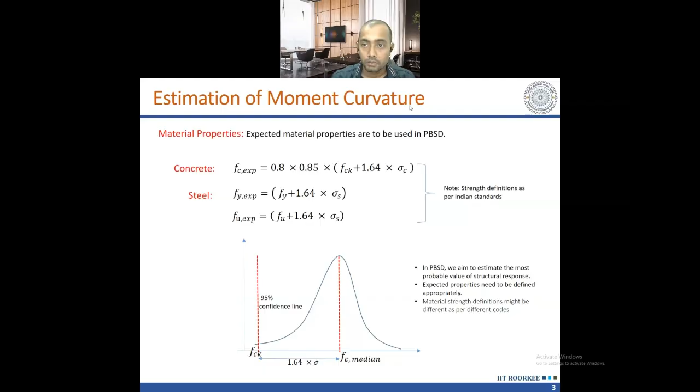I think I'm not able to change my slide. Sorry.

Okay, so the next part of discussion, we have to talk about confinement.

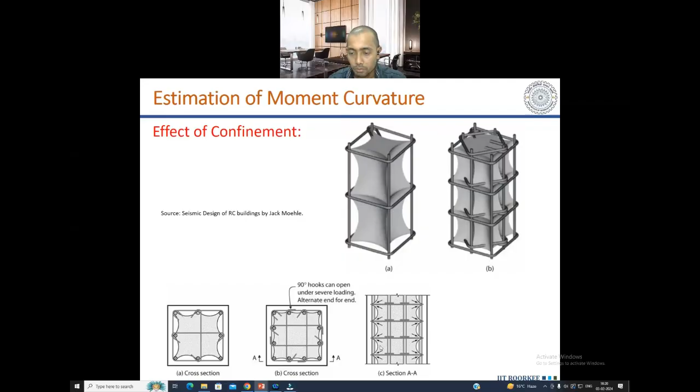Similarly, if you see along the length or axis of the member, not just in cross section, how much quantity of concrete is protected - along the vertical direction also you can see how it is protected because of the lateral reinforcement. So what happens?

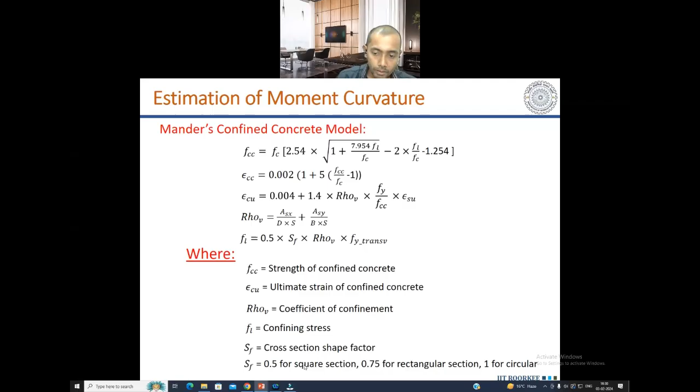Okay. Now in any section, you will have some neutral axis where there is no strain, there is no stress. Okay. And above the neutral axis, you say that is the compression zone, and below the neutral axis, you say that is the tension zone. Okay. And code says that the concrete portion in the tension zone should be...

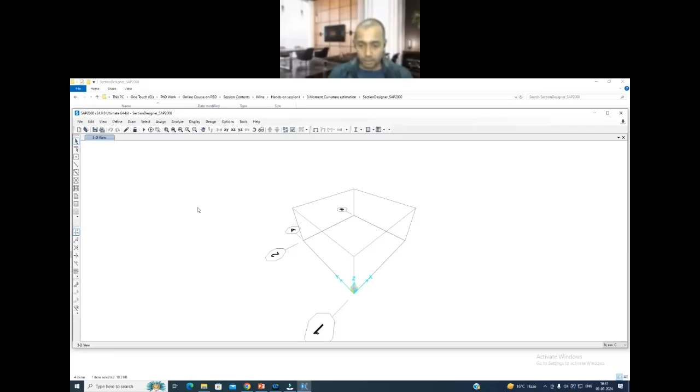Okay, so at this point, I have to let you know: whoever is a first-time user of SAP or ETABS, don't worry. When we start with our actual building model, all the steps you need for defining materials, defining sections, everything you'll come to know. We'll do it step by step. But still, I'll show whatever steps we have done, briefly without explaining in detail.

So first, we define the material. Here I have defined Fe 500 according to our Indian standard. Inside you can see this is the nominal yield strength, and this is the nominal ultimate strength, meaning the strength which is defined, for example 500 for Fe 500, and this is the expected one. I have shown you expected strength is equal to nominal strength plus 1.64 into sigma. If you use this, you'll get this expected yield strength.

Similarly, if you apply that concept to the ultimate strength, you'll get this one. Here you need the sigma value: expected ultimate strength is equal to nominal ultimate strength plus 1.64 into sigma s. That sigma s is normally between 30 to 50 in case of steel, and 5, as I already told, in case of concrete. Here you get this using 30, not 50. We have done some calibration based on experimental results and found 30 is appropriate for expected strength, so you can use 30 MPa for sigma in case of steel.

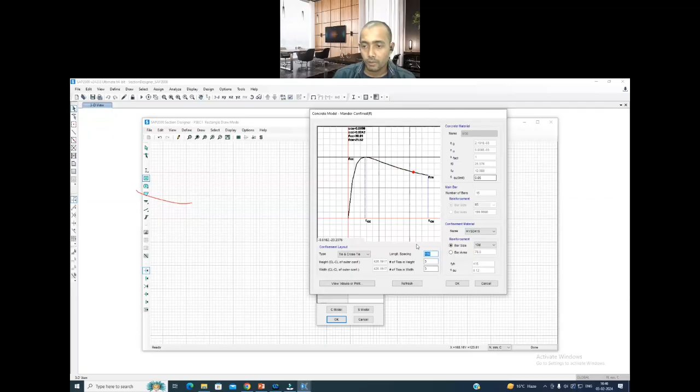And you can also see how these properties are changing when you modify these parameters. As you increase the number of legs, your strength is increasing, and with decreasing spacing also, this is increasing. So you can imagine how these parameters affect your confined properties of the concrete. So like this you have to do, then click OK.

Now see, it is showing some default arrangement of reinforcement also. So you may have different number of rebars and different diameter. So what you have to do, you just click on any of the bars, then right click. And here you see the bar diameter. Again, as per Indian standard, let's say I want to use 25 diameter for corner bars, and the remaining thing it will automatically calculate. And also if you want the same properties for all the edges, you can click on that.

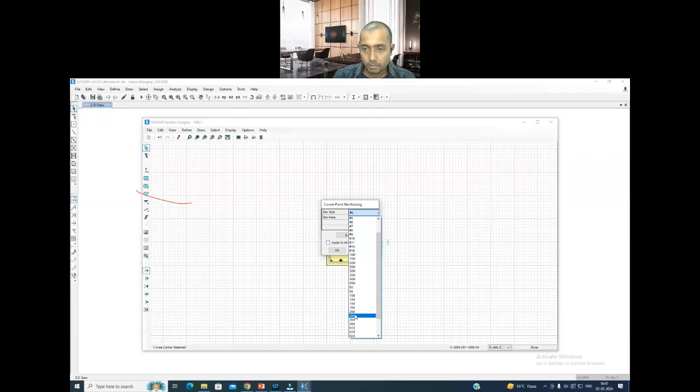Sorry, I think I didn't click that. So you can do this. Then for corner also, and apply to all corners. Then you can do this. So this is the thing you have to do in the section designer.

Now this is the default section shape which is available in the software. But suppose you want some customized shape, you can do that by using some lines. That option I will not discuss here. This is the interface you have. You can explore what different options do. You can do that also for customized sections of different types of shapes.

After creating the section, you click on this one to get your moment curvature, and here you see this is the moment curvature plot for zero axial force. Here you have to define the axial force, how much you have, and it is written tension is positive.

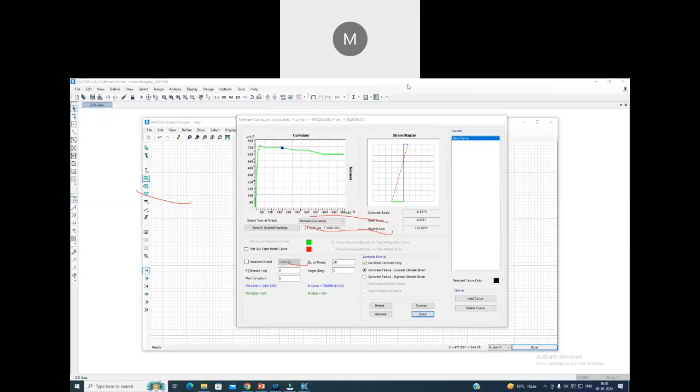I think someone is using annotation. Please, whoever is using that one, stop that. I don't know how I can do it from here. Sir, you can go to edit and there is an option annotate on or off. In the WebEx window there is an annotation tool on the top left, outside SAP. Or just reshare, it will go out. Okay, I'll do that. Someone is asking for approval of annotation. Please don't do that. Okay, it was here, top ribbon. Fine, we can continue.

So you have the compression force as axial force. You can give it as minus, for example, 1000 kilonewton. I am defining in terms of Newton, mm, centigrade. So it will be, sorry, 10 lakhs Newton. After doing this, you just click somewhere outside this box. You will get the update of this moment curvature curve.

Small question: what is the blue dot? The blue dot is, I think, some kind of performance level. Let me check. This is the performance level, but I don't know exactly which performance level. So this blue dot is strain of confined concrete. It's like capping strain of the confined concrete. Some performance level it is showing.

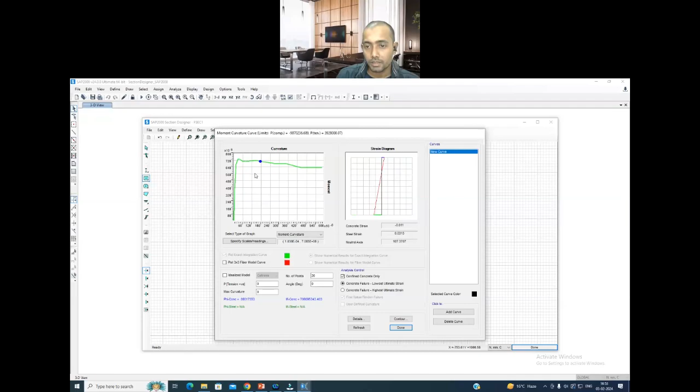But the strain is showing at the right, sir. Yeah, if you look at the diagram, it is strain showing stress. When you go along the M-phi curve, you can see values of strain are changing. If you look at the values here, into Excel, you can see the strain. You have to see here - when I am moving my cursor here, the strain variation you can see here, for concrete as well as for steel. Regarding strain, we will discuss this. You'll come to know, we'll discuss all these things.

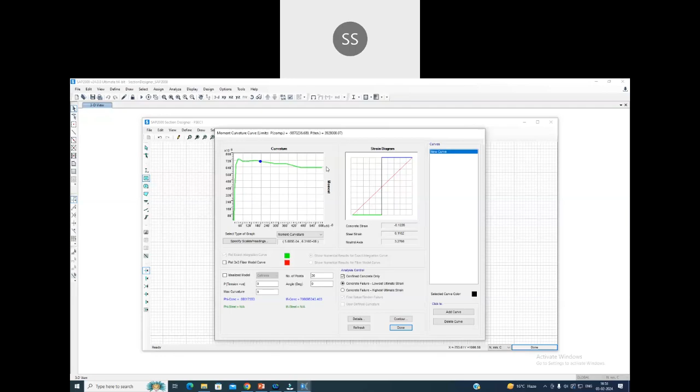Sir, this is not failure criteria actually. This is not showing any failure criteria. This is just a curve of your section. You have given some section as input. It is showing the overall capacity from zero to maximum, whatever capacity it has. Now you have to decide at what point you have to consider this as a failure. Okay, that we'll discuss. But actually I don't know exactly what it is showing, I have to verify this one. Don't compare this thing with the failure - that is a different thing, we'll discuss.

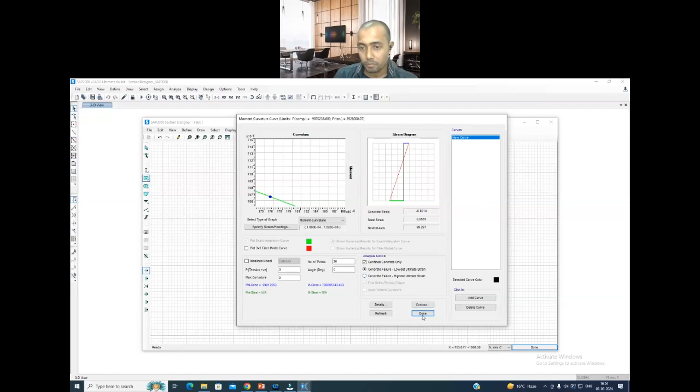We will discuss that, okay, please wait for a moment. I am telling you, just copy this data and plot in Excel, you'll get some different shape. Don't go by this interpretation.

Okay, so this section is already created, that's why I didn't save this one. And you see the shape here - this blue shape, as sir currently asked why it is going flat. This curvature is up to 0.0001. At this point you just check what is the strain value of that one, that you will get to know from this analysis again - for getting this curvature, what was the actual strain in your steel and what was the actual strain in your concrete. That parameter you can note down.

Now the software is giving some flat region. To verify this flat region, why it is giving this, you have to first find out what is the strain at this level, at this curvature level. So you analyze the section and at this curvature find out what is the strain here and what is the strain here. Once you get to know this - this much is the strain in steel and this much is the strain in concrete - then you go to this curve and verify at what point of the stress strain curve it is. This is what you have to do to understand whether it is failing or not.

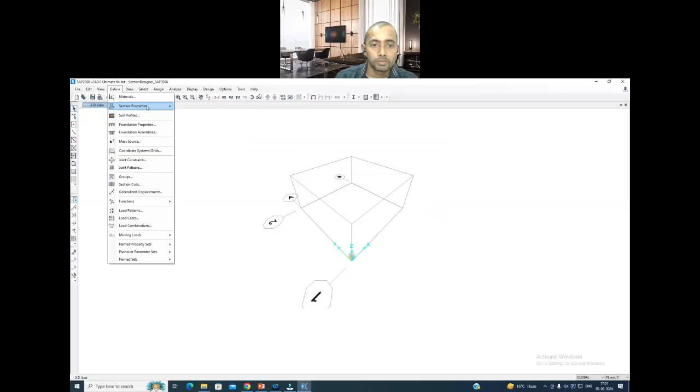So here it was getting down. Now see, it has changed, of course, and it will depend on the strain capacity whatever strain you are giving.

Please wait for a moment - when I go to the Python code, there I'll show you how you are defining that parameter, you will be more clear. Because if we start discussing this question in between, maybe we'll not be able to cover the session. So just keep your question ready, and whenever we come to that point you can ask. Okay sir.

Okay, so using SAP we have shown. Then SAP ETABS is similar, I'll just open and show - no, I'll not discuss, okay.

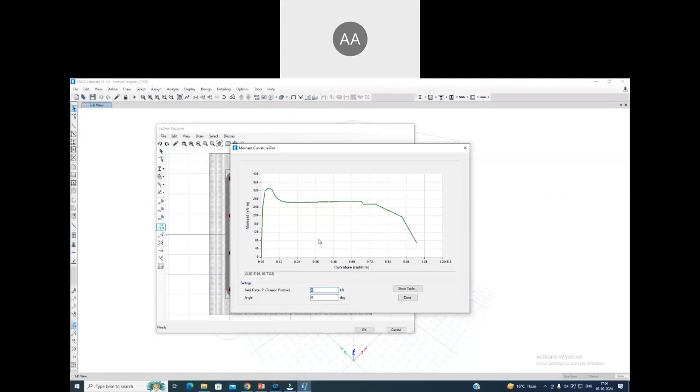After defining this, this is the moment curvature plot. Sir, your screen is frozen, it's not moving, it is still stuck. There is a lag. Yeah, it may be because of the network, I'll wait a few seconds. Let me know when the screen is coming. I am on ETABS and the section designer interface is open.

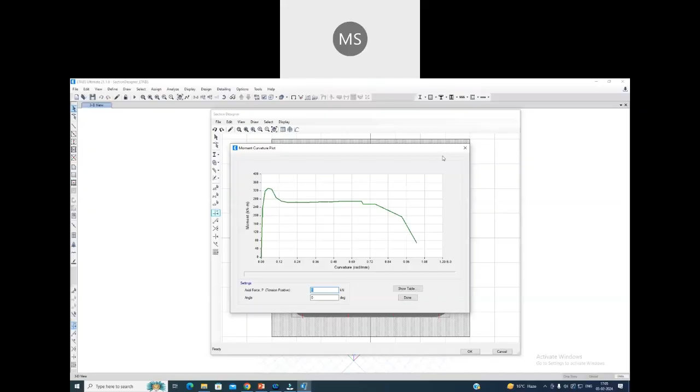It's visible now, I think the moment curvature plot is on the screen. Oh, that was the earlier one, I have just closed it. This is the section designer, you can see the cross section with reinforcement arranged. Yes, okay, so you click on the curve. Do it from the start, sir, the screen is lagging so we cannot see the starting. Okay fine, no problem, so I have opened ETABS.

Then you define the material similar to what you do in SAP. Here I have defined M30 for concrete, Fe415 for steel meaning transverse steels, and Fe500 for main steel. Again, these are all similar to SAP, you define these parameters here.

But there is one change with the concrete that I have to show. Earlier we defined the expected strength as 0.8 into 0.85 into FCK, which was 30, plus 1.64 into sigma, which was 5, so it came out to 25.976. But now here it says 32.47. This difference is because of this statement: concrete cube compressive strength. So you have to define the strength with respect to the cube, not the cylinder. The factor we multiplied to convert strength from cube to cylinder, which was 0.8, should be ignored here. If you ignore that 0.8, you get 32.47. This is one important thing you have to take care of when doing the design using SAP or ETABS.

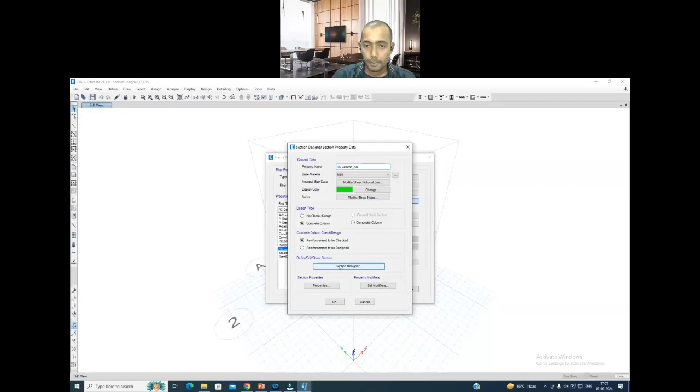Okay, next we can go to the section, and this is the section we have created. You just right click anywhere and you get these details: height, width, reinforcing with 12 number of bars, and you define the tie bar with 10mm diameter, corner bar and edge bar like this. You can do the same thing here by right clicking, whatever you have done in SAP, same thing you can do here. So this is how you create the section in ETABS, and clicking this option gives you the moment curvature.

Okay, and here also it is written axial force P, tension positive. Now, if I want to give it in compression terms, I have to use a negative term. Sorry, it is clearly written in kilonewton. Okay, so you have to give whatever is in kilonewton, that much.

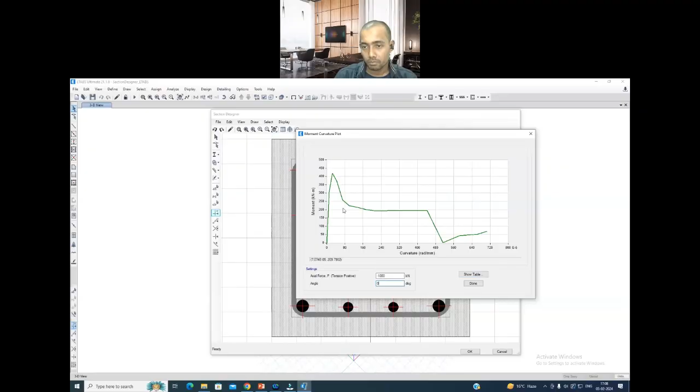Now see, and once again I am telling, don't go by this shape interpretation. You just copy this data in Excel and take only the range you need. Don't go by this whole shape interpretation. When you click on show table, you get this information. Just copy this in Excel. Okay, I got this one, so let me see what it is giving.

Sir, in ETABS, it does not give the option of inputting all the parameters like you did in SAP. Yeah, that's what I thought I'd explain now. You already raised this question. Yeah, ETABS is not giving, but there is one catch. If you see here, don't you think all the curves are in a similar range of strength up to this peak point?

ETABS is not giving you that, and I don't know exactly what ETABS does, because it doesn't know how much shear reinforcement I have provided, what spacing I have provided, and how many legs there are. ETABS doesn't know all these things, but still it gives values matching the others. Maybe coincidentally in this case, because it was only two-legged, by default it has considered two legs, so it is matching.

So if you want to determine moment curvature for, let's say, a shear wall having multiple legs, it may not give good results. So ETABS in this aspect is definitely unreliable, because you do not know how it is considering things. But you have some control in SAP, you have full control in STKO, and of course you have control in your manual calculation.

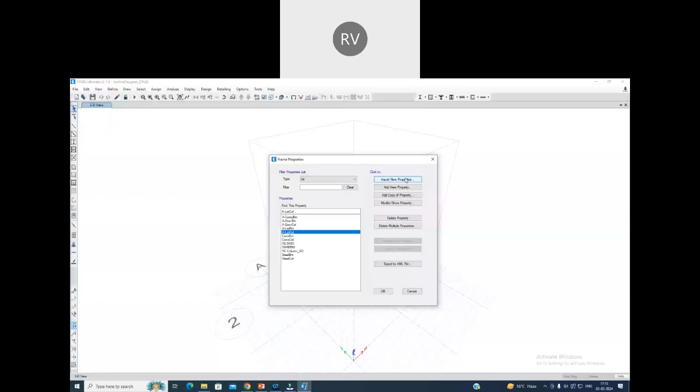That issue may be with the software. It should give, right? If you have some section, either it is steel section or concrete section, you have some section and some stress strain property, and you have whatever logic we have shown here. This logic is already implemented in the software, so definitely it should give. Now if the software is not giving, it means there is some issue with the software.

Okay sir. Okay, so this was using ETABS. Then let's see with the STKO. So here in STKO, you have a 1 month trial, which you can use with the full features available. But after 1 month, suppose you do not take your license, still it will be free. But the number of nodes you can define is limited to 1,000.

Okay. So I am doing the same thing. I am just defining one element, which is just 2 nodes. So up to 1,000 nodes, whatever element you have, you can use in that free version. But suppose you want to model a complete building in STKO, so this will not be enough. 1,000 nodes will not be enough.

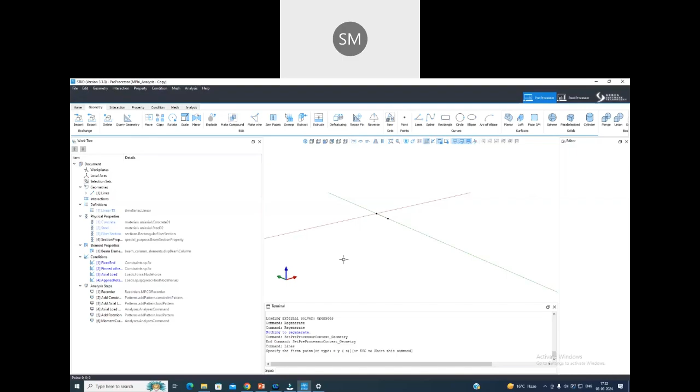Okay, so we were discussing about this STKO, how you can model. This model we have prepared in X and Z axis. You can see this axis is X and this axis is Z, and this blue color is showing Y axis. So I'll take the same axis and you can just take this line, and I have to show this grid option.

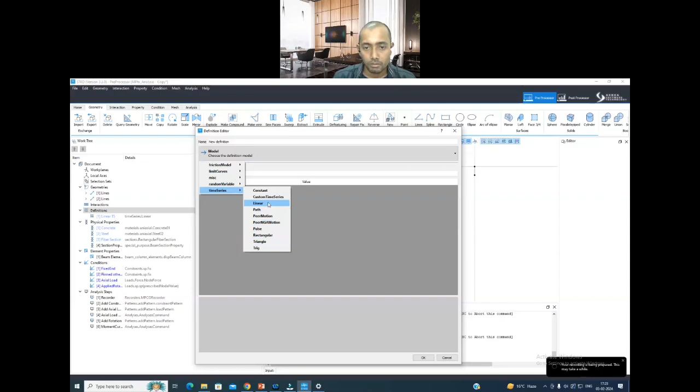Maybe I can try here just to show you how it works. You just take one line. Okay, so this geometry is defined. Now you go to physical properties. Sorry, before going to physical properties, you define some kind of load pattern. Now I'll define just a ramp load or linear load, you can say. You can define this one. Already one similar is defined here.

Then you go to physical properties, you add, and here you choose materials, uniaxial, and you have lots of options here, unlike SAP or ETABS where you get only one or two materials for concrete and steel. Here you have lots of different materials. And I also feel that when I try to find some materials, it's very difficult to identify at which option it is available. That many options you have. So you go to Concrete01. This is just an example, and you can explore what the other material types do.

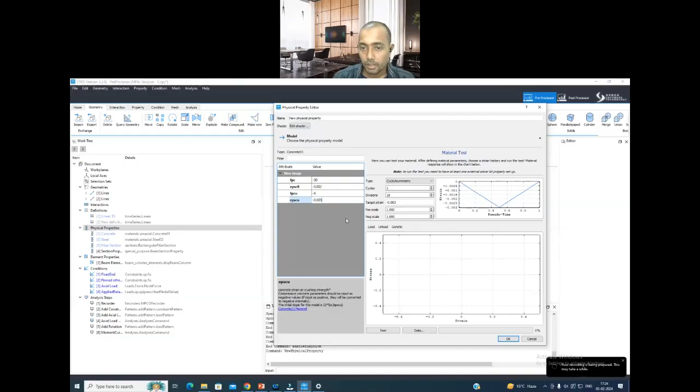Then what I did is it was M30. So here compression is negative; you have to give minus. Then minus strain corresponding to peak strength. Then you have ultimate strength, let's say -6. Then you have ultimate strain. You can define it in the range of 0.0035 to 0.005 or 0.006. So let's say 0.005, and you can test here how your material looks like.

Use the monotonic loading, then strain up to this much. We have actually defined up to 0.005, and you can click on this test button. So this is the stress strain curve for your unconfined concrete. Then click on this. Your material is defined.

So similarly, you can define steel. Same, click on this, then right click, add. Go to steel, uniaxial, and there are again different options. I have taken this Steel02. What each of these options do, you can explore and see. So our steel definition was 500, and this is the property of this model particularly, whatever I am defining.

925. This was 0.06 or something. I forgot. Let me see this. Sorry, this was 0.15. Okay, sorry. Here I have to use the expected properties. I forgot that.

So this was 550. And if you get some different value, don't bother about this one, because control is with you. When you are defining your material, you have the logic I have given already. You use that expression, and whatever you are getting, you can use that. Don't worry about what I am showing here.

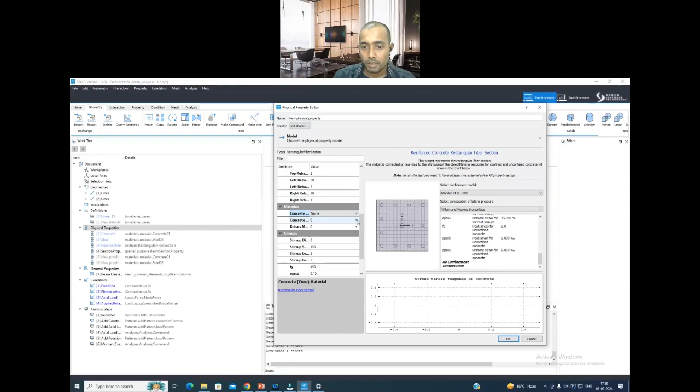Okay. Then this is for the outer portion of the core, which is not confined. Here we define this material, whatever we have defined. Okay, and you see here, this blue line is showing the unconfined concrete stress strain curve, and this purple line is showing the confined concrete. Okay, and similarly we define for steel,

and stirrups diameter, let's say it was 10 mm, and the spacing of stirrups was 150, two leg by two leg, and it was FE 415. So again 415 multiplied with the factor for expected properties. So whatever you are getting, 415 into something, 456. Okay, so your fiber section is also defined.

Now once you define your fiber section, that section should be assigned to this. Okay, so before that you have to assemble your fiber section with some integration procedure. When you talk about this finite element concept, it does the integration at some integration points. So that integration procedure you have to define here. So at the moment I have defined the Lobatto integration scheme, which is available in OpenSees.

Then here you choose what section should be considered for doing this integration. So I have defined that fiber section which is already there. Then the minimum number of integration points you have to define here. How many integration points you want? Since I am doing a section analysis, I need only one cross section. So I have defined minimum 2 sections here. You can go for higher numbers, but just for section analysis 2 points are enough.

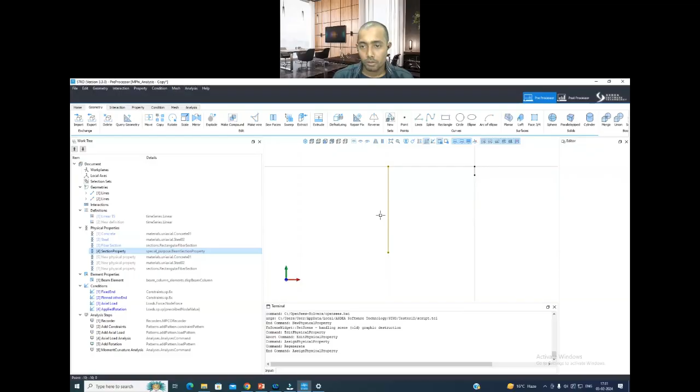Now see, the physical properties we have defined, but what about the element, how the element behavior is going to act in the OpenSees analysis? That you have to do here, element properties. Go to element, add, again you have similar options. And here you have beam column, and I think I have chosen force beam column or displacement beam column. You have options available for that. Let me check which option I have chosen. It is displacement beam column.

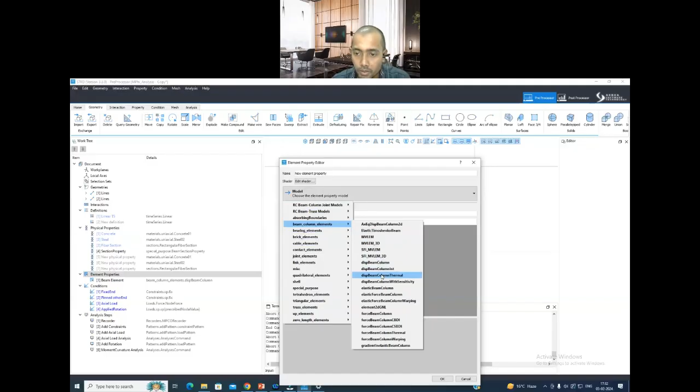So you go to that option, beam column elements, then you have displacement beam column. Okay, so after that, whatever is there by default you can choose. Just this element should be defined, no need to modify anything. Okay, now again after defining this, you click on this and just drag it. Okay, so element properties is defined.

Now this element property, as you go by this name, displacement beam, means it is doing the analysis in displacement control mode. Similarly, when you define force control, it will be doing the analysis in force control mode. Okay. So after that, you define the support conditions and other constraints. You have the condition option for that.

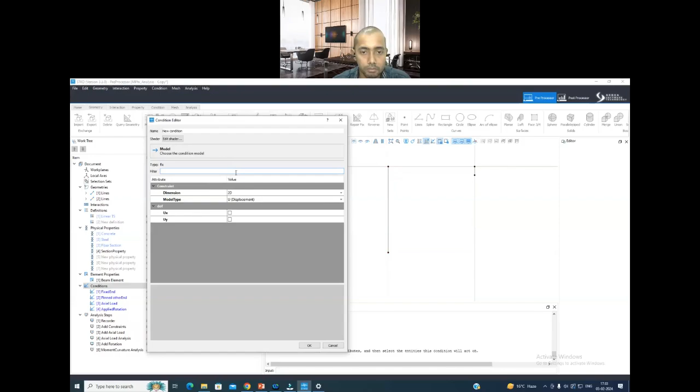Right click on that and add. Okay. First, we'll define the fixed option, means fixed support condition: constraint, single point, and fix. And consider 3D and displacement and rotation, and which degree of freedom you want to fix. So I want to fix all. Okay. So it is defined.

Then similarly, you have pinned other end. Okay, because I will be doing the displacement control analysis, so I should control the constraint of this point. So I have to pin whatever direction I do not want. Only the direction I want it to move, I will release that one. Okay, so you can see here I have pinned UZ. I do not want any movement in Z direction. I do not want any movement about X axis. I do not want any movement, means rotation about Y axis. Okay, that I have pinned

because my rotation, I will be applying the rotation RZ. My applied rotation will be in this. So I have released this one. So because of this rotation, I am also allowing the displacement in X axis and displacement in Y axis. Although Y axis you can again pin, no problem, but it doesn't matter. Okay.

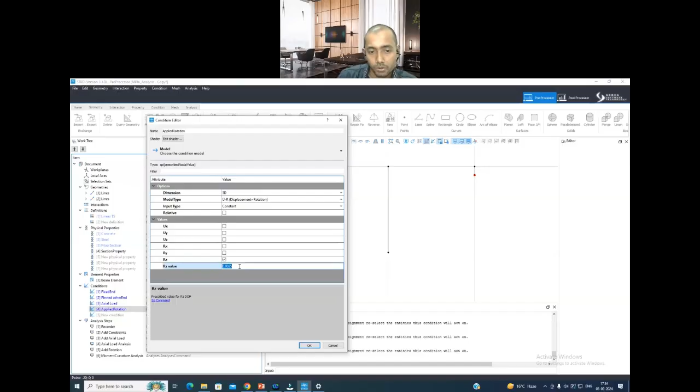Then you apply the axial force, whatever you have. So in this example, the axial force was 1435 kilonewton. That much I have defined, and you apply the rotation. Okay, and see, as I said, along this direction I have applied the rotation, and again, how much you want to apply, you can apply. I have applied 0.0025 radian rotation. Okay, so these last two I have not shown how you have to define. So this is the same procedure. You just go and find out where this option is available and you define that one.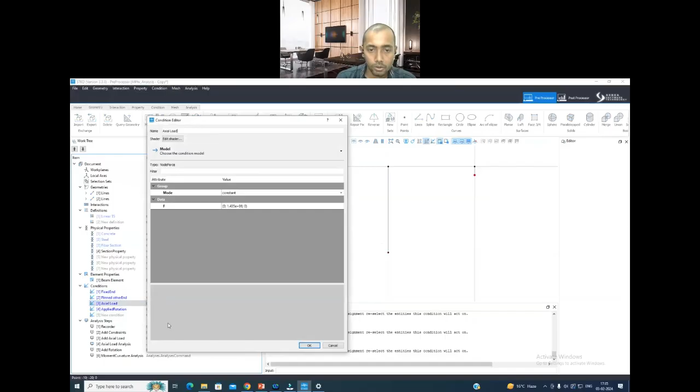Okay. Now, once you have done this one, what you have to do, you just click on this again and select the point where you want to apply this. Okay. So I want to apply this fixed point here. So I have just clicked this one and okay, it is applied. Then you go to this option. At what point you apply this one? Pinned other. So this is the other point I want to pin. Then go to axial force. I want to apply this. The directions are already defined, so don't have to worry about this one. And again, this one, applied rotation, I want to apply at this point only. Okay. So everything is done.

Now you have to arrange the sequence, and the algorithm you have to select which will do the analysis. Okay, so in STKO you have MPCO recorder, which actually controls the nonlinear or whatever, means numerical computation. It takes care of that. Okay, so you go to analysis steps, then add and recorders. Select MPCO recorder, and here the parameters you want as output, that you can decide here. It is also showing at what point I need the nodal result.

Displacement I want, rotation I want, then you want the reaction force, you want the reaction moment, and whatever you want you can select. Then I want also the element forces, I want element deformation, then I want section forces, I want section deformation, then I want material stress, I want material strain, and section fiber stresses, fiber strain, whatever you want you can choose here, and this can be deferred, no problems.

Okay, then you add the constraints. So this is like a sequence of your analysis, as you do in construction stage analysis. You define some stages following which you have to do the analysis. Here also you have to do it. After defining the geometry, you have to add the constraint. Whatever constraint we have defined, now our first step is to use those constraints in the structure.

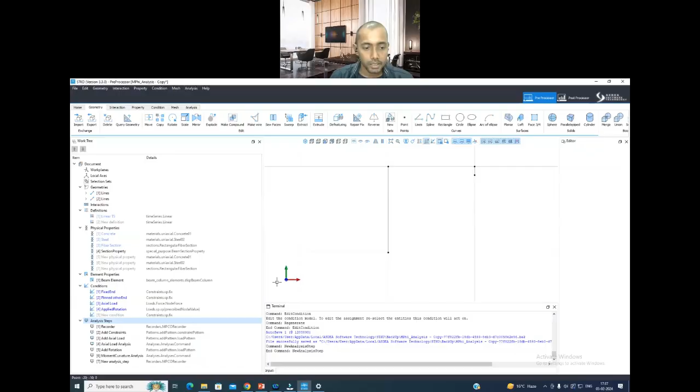Okay, so you use this add constraint option, and you click on this one, single point, because we are defining this constraint at a single point. That's why you have single point and multi-point options. Suppose you have more than one point, that time you have to go for multi-point. Okay, so you click on this, and here you see what I am doing at this step. I am defining two parameters at this step at the same time.

Okay, so initially it will be 0, nothing will be visible here, so you have to click. Now I have clicked, I have two options. I have to define the fixed end, and I have to define the pin end. I have done these two steps at the same time. Okay, but if you think you have to do it sequentially one after the other, you can do that.

It depends on how actually your structure is going to be analyzed. Okay, so next, after adding the constraint, you next add the axial load. Okay, and for adding the axial load, I have used the linear or ramp time series, whatever I have defined at the initial stage.

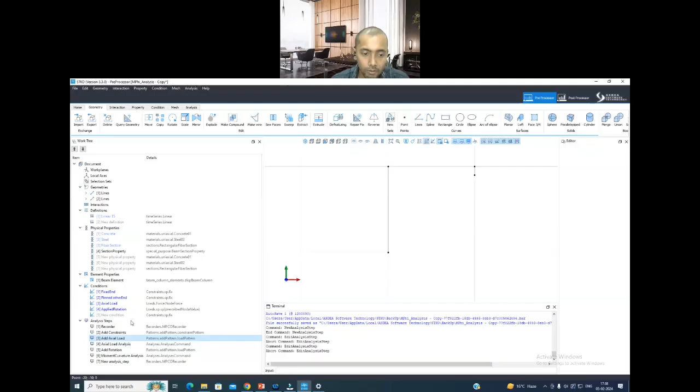Then what is written here: load, how much load you have to add, and at what point. Again, it will be 0 by default, you have to click 1, and if you have more than one load, you have to just increase this number. Okay, so I have one load, which is axial load, I have selected here. See, right now already everything is defined. That's why I'm canceling after defining. But in your case, when you are doing this for the first time, you have to assign this, not cancel. Okay.

So once your axial load is added, then you start analyzing the structure for that load. So you have to add this axial load analysis. This also you'll get from this option. Right click, add, and select your analysis and analysis command. So here you have all the things. Now whatever I have defined, I'll show you. See, this is a static analysis, and this is some constraint transformation method. You can explore in the OpenSees manual. I am also not very clear about how this works inside. Okay.

So these are some numerical parameters you have to define here, and here you have algorithm, which algorithm you want to use for your analysis. Okay, and you can go for norm displacement increment test or norm unbalance test. All these parameters you can explore actually. I have also been learning this software for the last few months, so I have some control with this, but not so much that I can give you a full explanation of that one. Okay, you can go through all this. And here it is load control. Okay, so that's all you have to define.

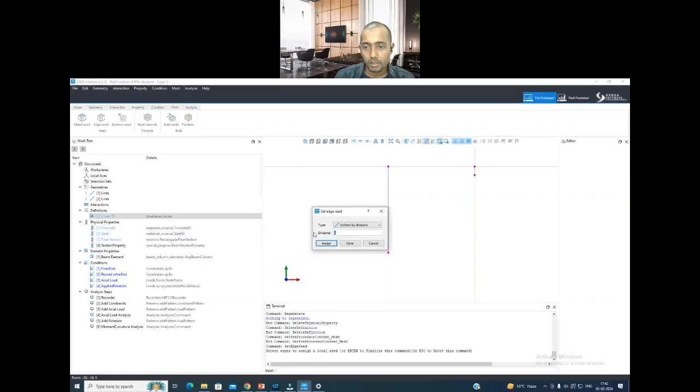Fine. Now see, here you have to define your mesh: for this element, how many divisions you want to make in meshing. Since this is a small element, I do not want any meshing. Maybe only one single element will be enough. But suppose I want to divide this into 5 elements, you can go to this one, define the number of divisions here, and it will show 5 nodes here in between. Then once your mesh is done, you just have to click on build mesh. Then the software will consider the mesh you have defined.

After that, you go to your analysis, and the software has 3 options for analysis: OpenSees, OpenSees multi-point, OpenSees single point. At the moment, I do not know what these other 2 options are doing, because I haven't explored this. So I just used this one, and you can also use the same thing. This was just done to show you how we create the model. I delete this one. Already it is created, right? So I'll just show the analysis steps, and this is showing where the output results should be saved.

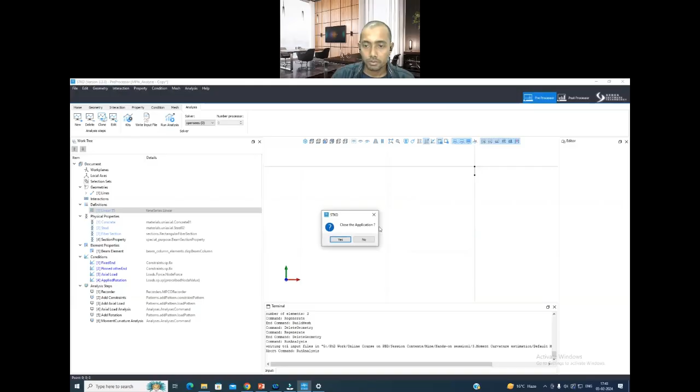So what we can do, we can click on this folder. Lines haven't been meshed. Okay, this is showing some error because we have edited, maybe somewhere some error occurred. So I'll use the previously saved model. This was the original model.

Okay, everything is done. Just click on build mesh and run your analysis. So your analysis is done, and go to post processor. You just call that output from wherever you have saved it in that folder.

Okay, so it is showing one section, whatever section we have created. And I do not want this solid geometry, I just want to see the fibers. You can do this by clicking on this option, and I'll delete this surface. Now you can see the fiber.

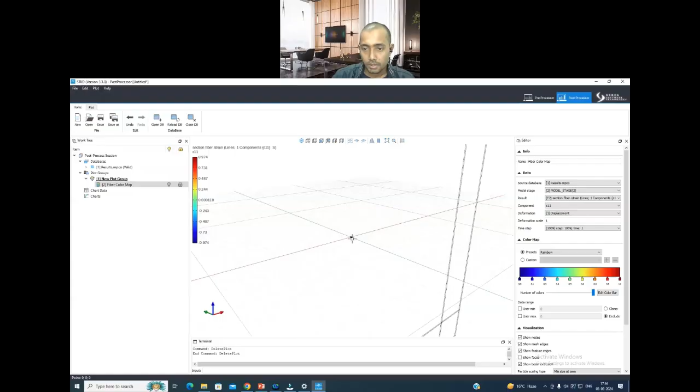Okay, and I want to also show the nodes here. See, there are 2 nodes as we have defined earlier, 2 nodes in the integration scheme.

Now you have to plot the chart. Go to extract. I want the values at the nodes, then click on that option. See, there are 2 stages of analysis as we have done. We have defined one stage for gravity analysis, meaning axial load, and another for lateral rotation.

So I want the result for the second stage only. Then in terms of what? In terms of rotation about the z-axis, and in terms of moment about the mz axis. Then next, you define at what node I want this. So I want it at this node.

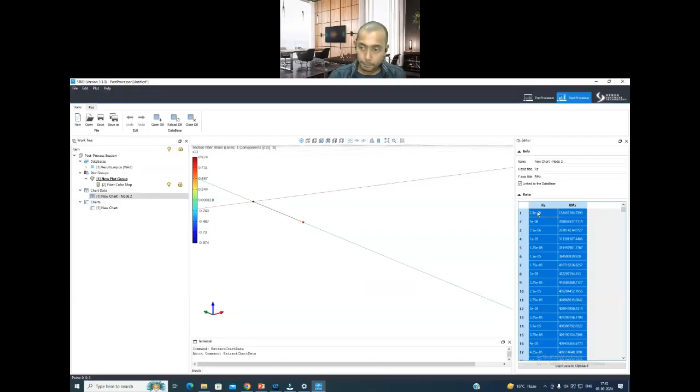Next, next, and it is giving you a nice curve. Let's see what this looks like. Control all, and copy. You can just plot it.

Okay, so for whatever range of rotation you have given, it is showing a flat region for that. So again, here I want to emphasize this point: do not go by the interpretation of shape. You just consider the range, how much is important to you.

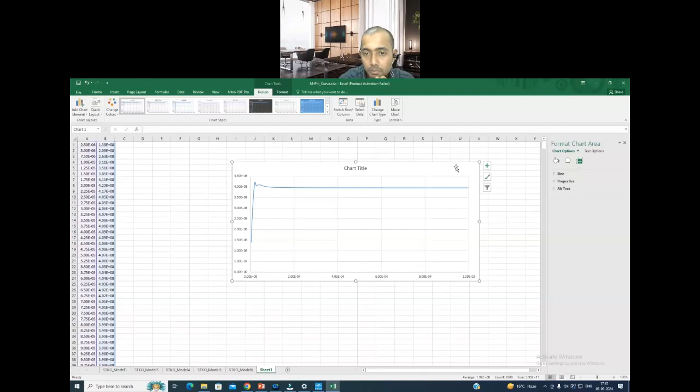Can I ask a question? Yeah, please. So this infinite ductility that we can see in this curve, if we measure the curvature ductility, it will be very, very high, which we can never achieve. So how can we limit that? Based on what inference or what measure should we use to limit it?

Actually, here what control you have, let me go to material definition. The control you have is here. You have definition of ultimate strain, definition of peak strain, and another control here. But other than this, you do not have any control here. So I don't know what actually the software does to give this ultimate ductility.

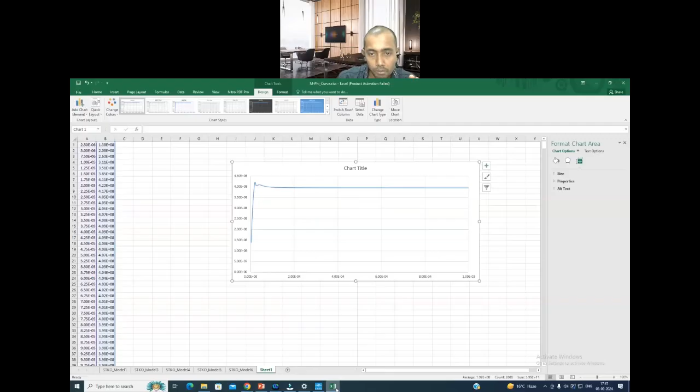But when you do it manually, as I have shown in my presentation, suppose you go by this approach. Although some mistakes maybe I have to rectify, it is going down, so it will come like this. When you do it manually, you have full control. You can do that. But with software, I don't know.

They have designed the software, and what parameters they have considered, I do not have any idea. So that's why I'm saying, when you are determining moment curvature from software, you should consider only up to the peak point, where you have the peak force and whatever is on the horizontal axis, either strain or curvature. Don't go beyond this peak point. After that, you have to make your own judgment for that portion.

That's why I always use the manual calculation. In this software, what you get is one peak strength and another, initial stiffness. These two parameters are correct, as you can see from this validation. All four different procedures I have followed give almost the same stiffness and almost the same peak strength. So you can consider up to this point from the software, but the remaining portion, I don't know why the software does this for ultimate strain or curvature capability.

Maybe shear is not captured in that. The moment will also generate shear here, but that shear demand and capacity is not addressed. That's why it can be unlimited. So this you can only verify by trying with different options.

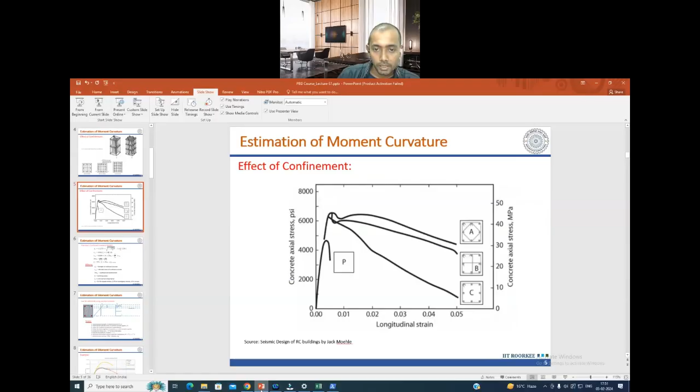I think many people who have not used any programming have the intention in mind that, oh, this is programming, I cannot do that. It's not like that, because I also did not use programming until before one year. For the last one year I have been trying, and I have so far created around 20 or 30 programs for my research purpose. So it doesn't matter whether you have used it or not - you just need some idea and you want to implement it. Maybe some commands you have to learn, which is for each software or each programming language.

So this I'm not going to explain because I have already explained here. These things I have done, I have implemented in this program, but I'll just give you a brief idea of how Python works. Before that, let me show you how this works.

Okay, and for that I have to wait for some time because of this. I'll increase this tolerance so that it runs fast. Okay, let me run this. So it is asking to enter the ratio of design strength to yield strength.

So this I have created as per our Indian standard. It should supposed to be 0.87, but since I am doing the analysis based on expected properties, I'll use it as 1. Similarly, it's asking for transverse reinforcement also, and the shape it is asking - shape was rectangular or whatever shape you have.

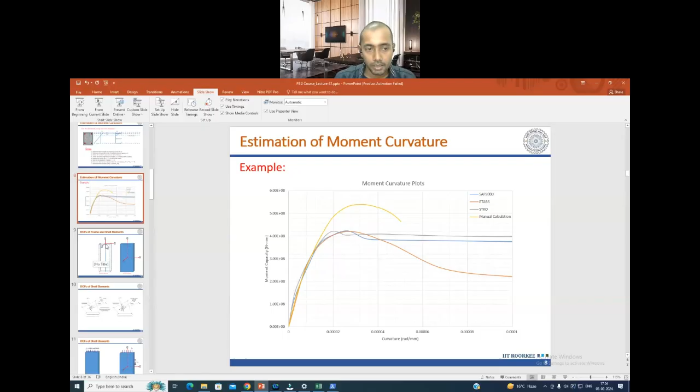And I am also going to teach how you can model your shear wall using this frame element. At that point, I think most people will get confused because you want to use the shell element, but you do not want to use the degree of freedom defined for shell element - that should be avoided, otherwise your model will not be correct.

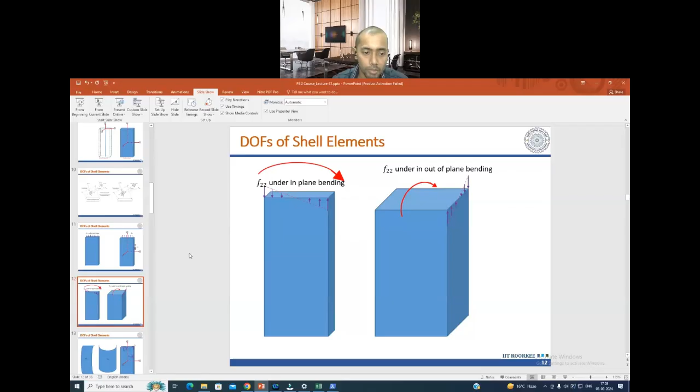Then you have M22. This means the whole column or whole shear wall you are trying to bend about the horizontal axis. So this is your M22, and you have shear. You have shear along V13, direction 1 and plane 3, and V23, direction 2 and plane 3, and F12, direction 1 and plane 2. So F12 is going to be equal to F21, and V23 is going to be equal to V32, like that. I forgot the term we call this one.

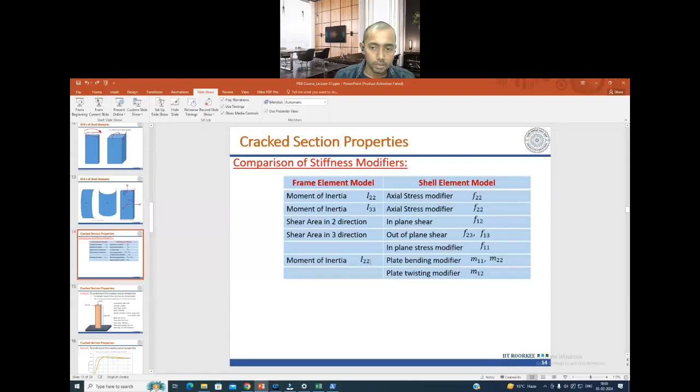Then as the analysis goes on, the cracking will occur at other portions also. So at that point, that concrete will get cracked. Okay. After cracking, the cross section you have considered for gross moment of inertia is no more valid because it is a reduced cross section now. So to consider this effect, we define these stiffness modifiers based on experimentation done on a large number of models. The code people have come up with some approximate values that you can use. But we'll try to see with a practical example. And before that, again, this is done with this example column actually.

And here you see what I have done. First model, which is in blue color, is distributed fiber plasticity, means this whole cross section is considered as non-linear. I have modeled it using fibers at different points. So non-linearity is considered in the whole section, and I do not have to use any crack section in this case. Then another orange line is there, which is finite length fiber hinge. Means this is also fiber section, but nonlinearity is considered only at the bottom and at the top. Intermediate portion is considered as elastic. So in this case, I have to consider the crack section for the intermediate portion.

Then I have considered the moment rotation hinge considering the uncracked section, means I did not consider any stiffness modifiers. I have considered the gross moment of inertia, and this is the curve you can see. Okay. Then next is moment rotation hinge using the crack section properties, and you can see this is merged with the fiber section of continuum, means distributed plasticity or finite length plasticity.

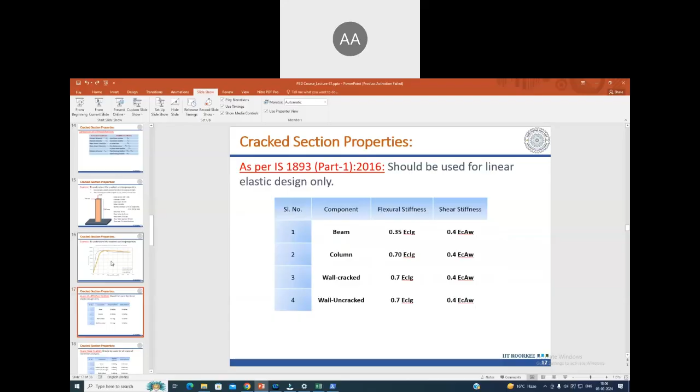Sorry to interrupt. Are these results from some research paper? This is, you can say, my research actually, not from a paper. If I publish this paper, then you can say it is from a paper. But at the moment, it is part of research. Okay.

And whatever models I have used for this, I will be sharing all the models. You can do whatever experimentation you want to do with this. All the models, ETABS, SAP, STAAD, everything I will be sharing.

Now see, these are the cracked section properties defined in our IS code, Indian standard. For beam, you have flexural stiffness consideration as 35% of gross inertia and shear 40% of EA. EA is the gross stiffness, shear stiffness I'm talking about. Similarly, for column, it is 0.7, means 70%. For wall, cracked 70%, uncracked again 70%, and 40% in all the cases for shear stiffness.

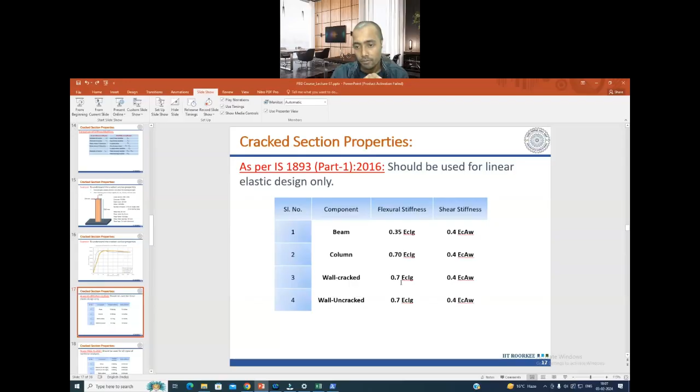So here what I want to say is for column and shear wall, it is fixed irrespective of whatever axial load you apply or whatever section capacity or whatever reinforcement you have. Actually, this is not appropriate if I consider all those parameters. This you can understand from this example. This is as per ASCE 41. 1 minute.

So for beam, it is given as 30%. Again, all these values are based on experimentation. There may be some differences. For example, in some member they got 30%, some member maybe 25, some member maybe 40. But based on a large number of experiments, they have come up with some value. So this is the median value of all those experiments, 30%.

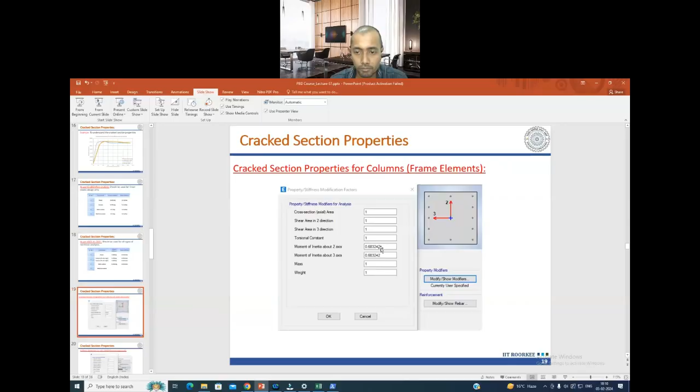Then you have stiffness modifiers for shell element. And here I have seen people making mistakes. This is the correct interpretation of how you have to define the stiffness modifiers for shell. You have to define F11, F22, and as I was saying, M11 and M22. I think I can show this one. I told you are defining I22, but it is for out of plane. So although you are defining I22 for this purpose, it is also representing this one.

So what happens actually? It will happen because of this dimension. Since this dimension is very much negligible compared to this dimension, it will automatically be ignored when you're defining using the frame element. So I have defined I22, I33 and cross-sectional area, and the other out of plane you can ignore. Sorry, I was wrong here. So out of plane you define here and you ignore this one.

And this F22, what I have told here, will be considered using the other I parameter. Let's say this is in plane, so it will be considered by this one, and you can use a negligible value to represent this one. So this will be represented by this one.

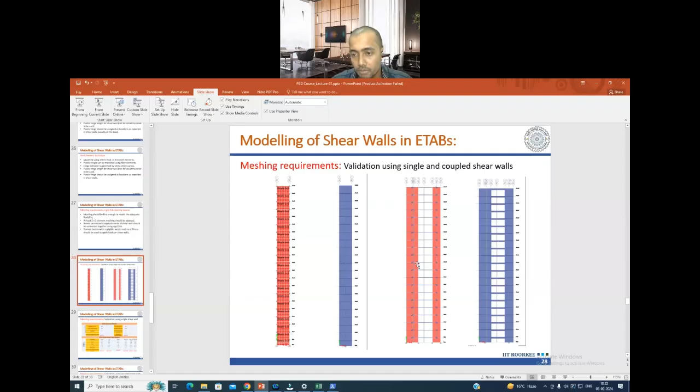Now see, whatever I talked about regarding meshing and the shell element and frame element, this validation work we have done using a single shear wall and a coupled shear wall. These results I'll show you now. Here you see we have used 5 by 5 meshing. Here also I have used it, but not shown it. You can see the horizontal link, shown as two zigzag lines, and a dummy beam is also there, not visible here. Then these are the comparison of results. This is validation using the single shear wall in the first case.

So this was the result I got using wide column, and next using shell element with different mesh definitions. First I have used without any meshing. By default it is a single element, one by one, and same parameters. These are representing the similar thing what is defined here. If you go by the comparison I have shown earlier, this will be similar. Okay, then you see, this is the result I got.

Then I have increased to 5 by 5, and see, exactly whatever I got in the wide column, same thing I got here. Then I have increased further to see what effect it has. So there is a little bit of variation but negligible. Now if you want to increase the number of meshing beyond that, there are some variations but not that significant. So you can go by this meshing but it is not necessary. 5 by 5 is enough. So based on this experimentation, we suggest you can use 5 by 5 meshing in case of shell element. And this was done using the single element experiment.

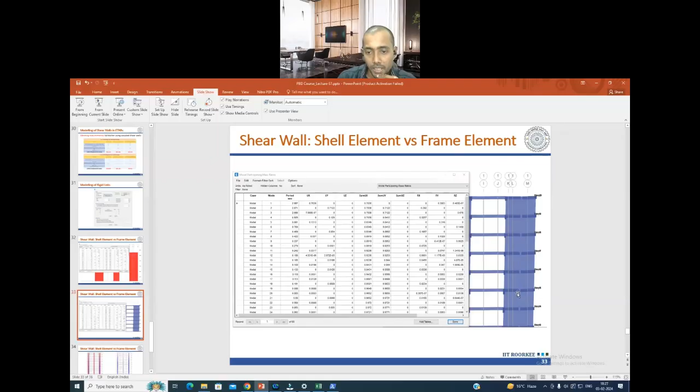And I expect if you use this one, your model will not be wrong, and it will also help in your computational time. And the nonlinear modeling part will become easy once you do with this model, because people always get scared about running the huge structure using shell element for nonlinear analysis. So once you do this one, that wariness will go away.

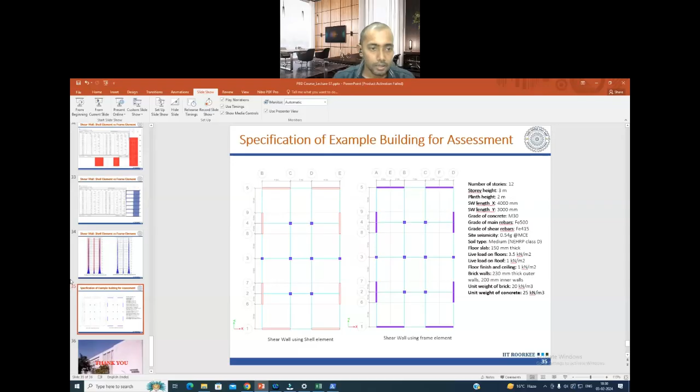Now I think I have to show one thing, how to define this rigid link. Let me show this first. I'll take 5 more minutes. I can open any model, no problem.

So this is the model what we'll be using from next session. You can see here the definition of your springs, it will be here. Not spring actually, link, rigid link. You go to this, either you add or modify this one which is available by default. You just check all these boxes. So only this one you have to ignore.

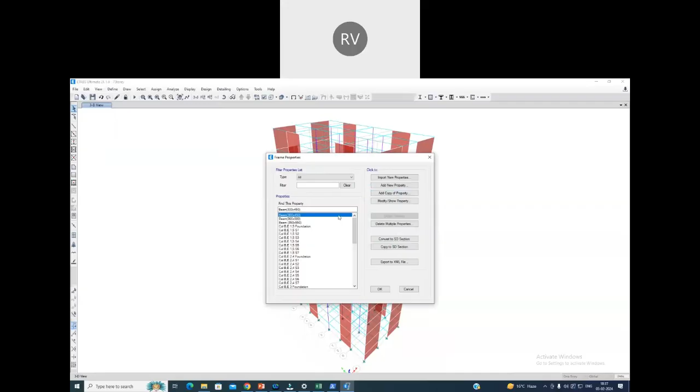Go to define, then frame wall non-linear hinge. It will be here, assign frame. No sir, we are in the define section only. Non-linear hinge.

Add new property, add new properties, concrete, then M3, it's okay sir. Fiber PM3, some hinge I have to define. I'm not talking about fiber modeling, only lumped plasticity I'm talking about. I understood, one minute.

Add new property concrete, and you want to talk about interaction hinge. No sir, moment 3 only. Okay, that will be for beam, right?

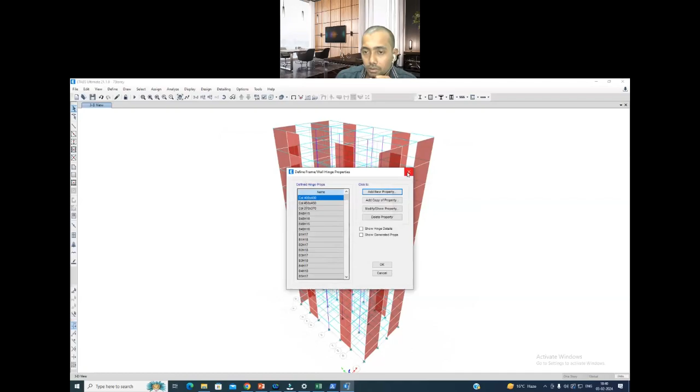Okay sir. Excuse me sir, can you go again to that part?

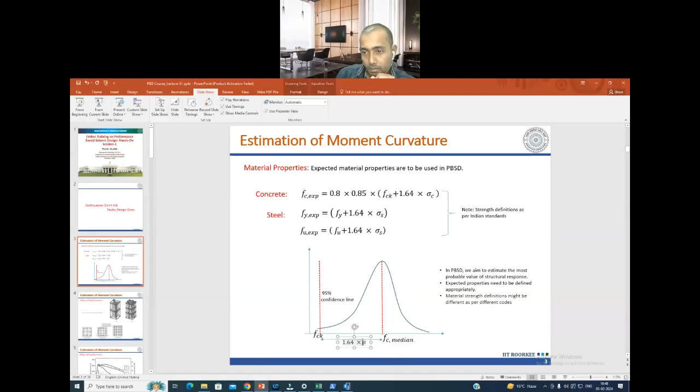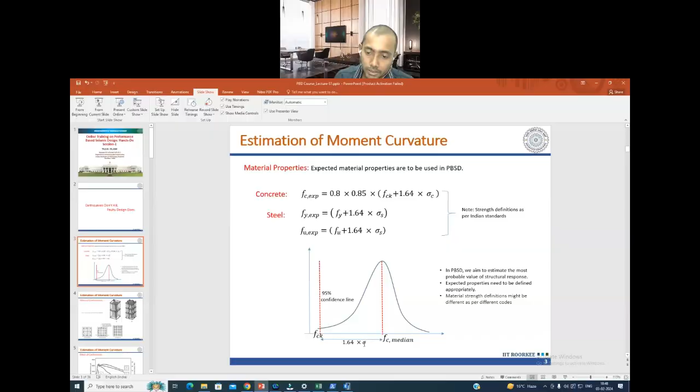Sigma is depending on different parameters. Some parameters are known to us, some are not known, because if you talk about concrete, it is a mixture of aggregates, cement, sand, and water. Once you mix all those things, all having different properties, together they create a new different property which we do not fully understand. So the meaning of sigma is the deviation, meaning variation, which is not taken into account in this estimation. So to take safety into account, we consider this 1.64 sigma.

This variation is coming from this probability distribution curve. When you prepare the distribution based on a large number of experiments, you will not get a single line, it will be a range of values. For example, from here to here, a range of values will be there. If you take the average of that range, that average line is represented here, and from this average line, the extreme point of that range is represented by this sigma.

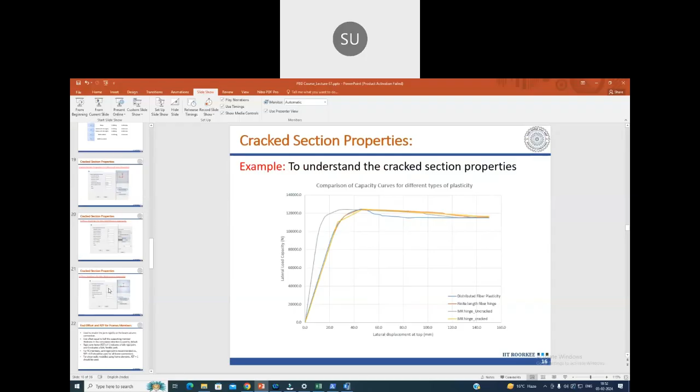Are you talking about my example? No, I didn't use the shear modifier in my example. Okay, can you go? You have applied it for area. Can you tell which slide you are talking about? Property modifier for shear wall. Okay, one minute. Can you go to the second one? This is the next slide. Yeah, this one, right?

So, do you expect any failure in the concrete because of axial force? Yeah, there can be, because sometimes there's very high axial force in columns and shear walls. In extreme cases you can, but generally columns are under-compression members. Generally failure occurs because of flexure, so compression I don't think will cause any problem. But in gravity, compression is the main concern, no? But we have the same model for gravity and earthquake also.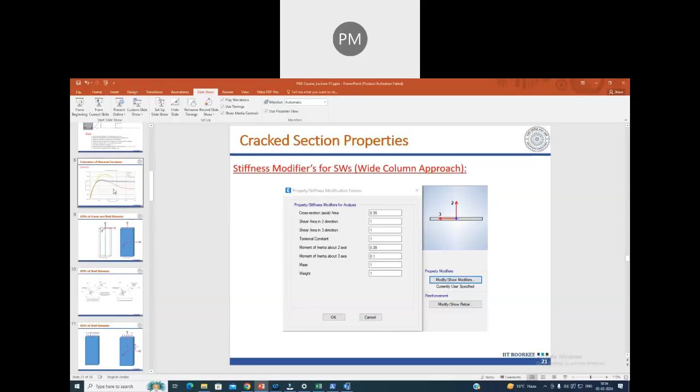Tajul, may I add something? Yes, please. So Suresh, if you go to the moment curvature curve and calculate the EI, you will find that the EI you assumed for your beam and the EI you get from the moment curvature curve are different. If we check the linear portion of the curve, we know that M/I = E/R, which gives M/phi = EI.

Yes, I know that the curve will deviate at the Mcr value. If we calculate the EI in that linear portion, it will be approximately the codal recommended effective EI you are taking. However, when you move towards axial failure or shear failure, you haven't changed your section stiffness. So it is recommended to use reductions in shear and axial stiffness for conservatism: since I have reduced the flexural rigidity by a certain margin, I reduce all other rigidities as well.

So you are already on the safer side, right? No need to be worried. Maybe sometimes too conservative. See, conservatism will come only when that failure is occurring in reality. Normally, you do not expect failure.

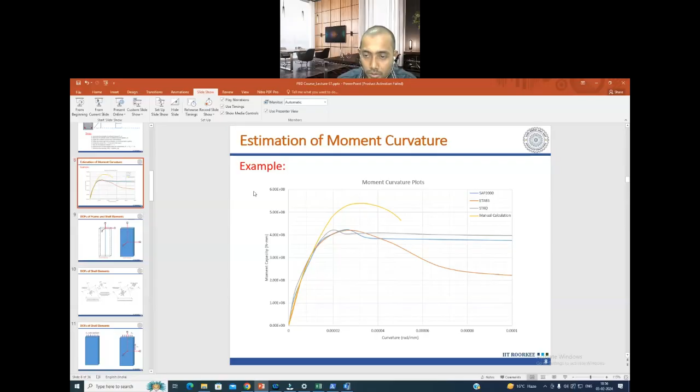If you take 35% of cross-sectional stiffness also, you do not expect failure in most of the cases because of the pure compression loading. Because our gravity design is very much overestimated already in terms of capacity because of a lot of load factor, partial safety factor and all. So that failure will not really come.

Sir, I have one doubt. You discussed the layered shell technique where we need not give the hinge properties. Yes. It will automatically do nonlinear analysis through which it will find where the failure or the hinge will occur. It will automatically account for that. So do we have this thing in wide beam, wide column also? Like layered? No. In wide beam, you have to define the hinge manually, like what you do in the case of a column.

Okay, so if I have a very good workstation and I use the layered shell technique and carry out analysis, will the hinges I get from that be sufficient, or, since we are giving hinges from our side and deciding the location, will all these things be skipped? No, actually in layered shell, the concept of hinge itself is not there, because that whole section is acting as a nonlinear region from bottom to top. So nonlinearity will be occurring over the entire length of your member.

But suppose if you talk about the base, the nonlinear behavior will be higher compared to the other region. Maybe the curvature or rotation that has occurred is much higher compared to the other region. So that is the difference, but it will be fully nonlinear from bottom to top. There is no concept of hinge if you model using layered shell element, and this nonlinear behavior will be taken care of by the stress-strain curve of your material. Okay.

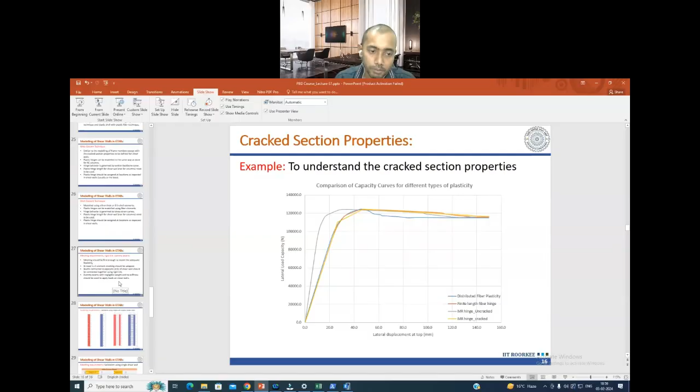See, I talked about the cracked section properties, right? Now, if you model your shell element using either layered shell or elastic shell with the plastic hinge, in that case you do not have to define these cracked section properties. Sorry, in case of shell element you have to define them, but layered shell I didn't use actually. I have to look at how it behaves. You have to define cracked section properties here also. For the difference, I have to do experimentation again, because validation should be done before making any comment.

Sir, can you explain rigid link for shear wall and beam once again? Okay, actually rigid link, why we do it, let me open one example. And also give the idea about how to assign the rigid link. Yeah, these things will be given. Don't worry. When you start with the model, one building plan I have given at the end will be analyzed throughout the sessions, right? So whatever I have explained today will be implemented. Don't worry.

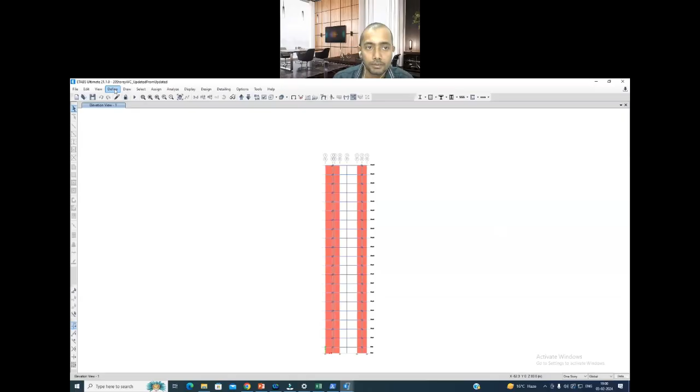So let me show the analysis result. Let us take one lateral load case. Now you see this rigid link is connected between this and this node, not connected with any other intermediate node created by meshing. I have connected only these 2 points by this rigid link, and this beam is connected to this rigid link, means you directly connected this point, so it automatically gets connected to this link.

Similarly here also. Now when you run analysis and see your structural behavior, this deformation pattern is very much expected as per our general understanding. But see the same thing without using rigid link. You can see this beam is actually in double curvature. If you do not use this rigid link, it will be like a straight line. In that case, this point will be acting as a pin connection instead of a rigid connection.

So that thing is taken care of by this rigid link, and it also depends on your mesh definition. As your mesh becomes finer, this will try to act like a pin connection. So that's why we mesh it properly and use this rigid link to take care of this thing.

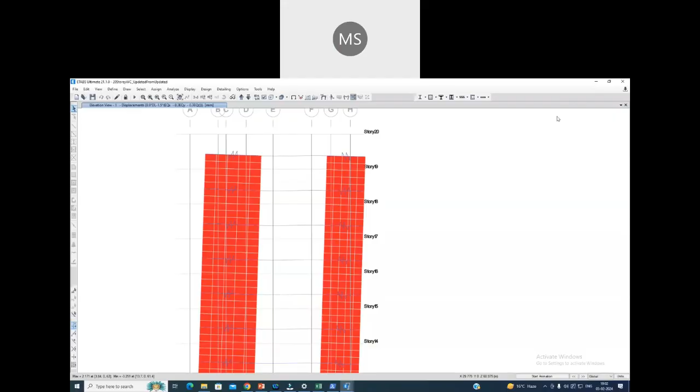Thank you. Okay. Sir, can you give reference for the curvature, for 1893, for columns? One by one, please. Moment curvature for column, sir. Can you please explain that? We'll come to everyone, one by one. I think Mohammed Tala Siddiqui, you can proceed with your question.

Can you give the reference in 1893 for the shear rigidity that you have shown in your slide? Yeah, you can use it. Why not? But in the code we didn't find this modifier. Can you give the page number or article number reference, please? Tajul, I'll answer this.

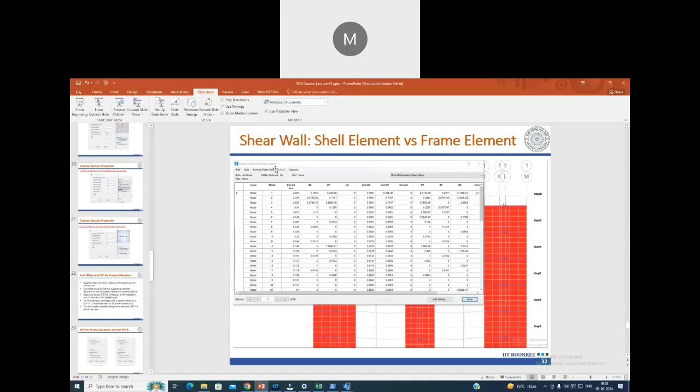See, this is basically when you're taking the shear rigidity, that's only the conversion of E and G. G is like 0.4 E. So since you are defining it by E, that's why you can do it by 0.4. But really speaking, in a linear analysis, it doesn't make much of a difference. We have been doing it for long. So actually, don't worry about it.

Let me explain this once again so that everyone gets clarification. G equals 0.4 of E, that's how it is done. I think the confusion was created because of this. This is in terms of E, but your shear stiffness is not in terms of E, it is in terms of G. So 0.4 into E is becoming E divided by 2 into 1 plus mu, right? So from that definition, you are getting this one. So in terms of G, it is full rigidity. We have not reduced it actually.

Actually, that multiplier is for I, right? Not E. Why are you converting E to G? See, shear is defined in terms of G and area. Shear rigidity is GA, not EI. EI is the flexural rigidity. We know GA, but for 0.35 E we are saying 0.4 G, right? But it should be 0.35 I, not 0.35 E, because it is about cracking, not about material nonlinearity.

Is it making any difference if it's 0.35 I or 0.35 EI? E is constant, right? That conversion is only for the shear, because shear rigidity is not EA, it is GA. So just to express it in terms of E, G is replaced by 0.4 E. Don't worry about this point. It's not going to change much for a linear analysis. We are talking only about this last column, not the flexural stiffness.

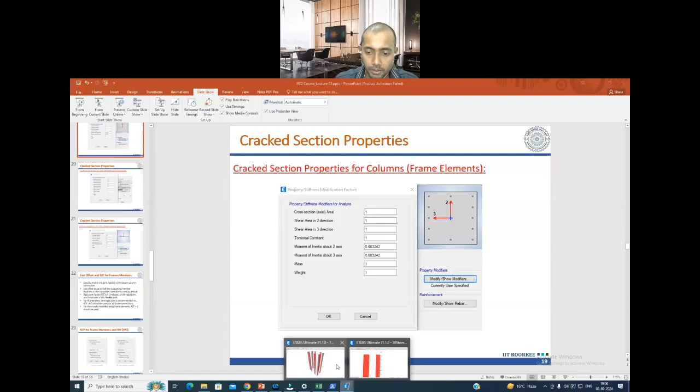Okay, for example, we need to assign separate material properties to the boundary elements and the mid zone, correct? Hello? Hello? Am I audible? Yeah, you are audible. Section analysis of column, that was the one question I wanted to ask. Bhushan, I think you're trying to say something.

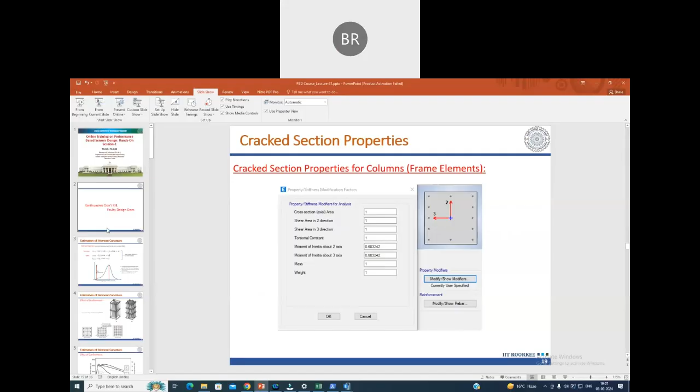Yeah, section analysis for column, like we are doing it for beam. Beam is easier, but for the column we do the stress-strain analysis layer-wise, taking the reinforcement per layer for that number of layers. So for manual calculation, what is the procedure we can follow, like for beams? Same procedure. Can you see my slide?

Okay, so suppose this is a column, and this axial force is acting on the column, and I have layers of reinforcement. So I'll just copy some reinforcement. Suppose I have reinforcement here, and here. This is the question you asked, right? Yes. Okay, let me put some more reinforcement, and also at the top.

So now, depending on the number of layers you have, that number of forces will come, right? Here you have force for this reinforcement. Here you have force for this reinforcement. So the procedure is going to be the same, just your calculation effort will increase. You have two additional forces.

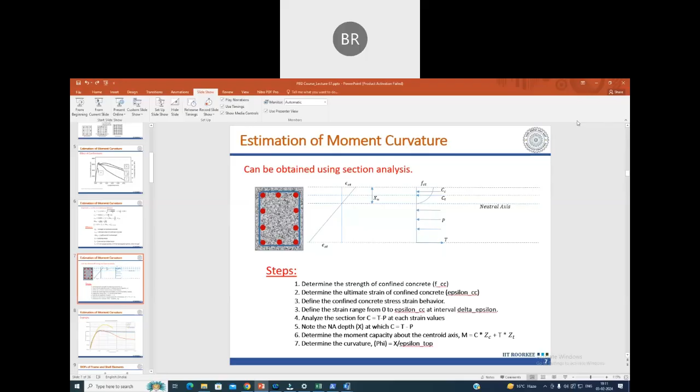So my initial assumption of where my neutral axis will be, I need to first find that, then I can do this particular thing. Yes, so it is an iterative process. While coding, it will become basically some issue with respect to that, because first I have to analyze whether the neutral axis is inside or outside, or at what position it is, which is governed by the reinforcement. I got your point. Let me show my code and I'll try to show what I have done. Actually, I'll also share this code. You can use this and try to understand what I have done. But I'll show you that portion of what I did.

Okay, so one more thing I forgot before answering your question, just let me show you. Actually, you can use Python for doing this kind of stuff. Not only Python, you can use any coding platform, whatever language you are expert with, and you can prepare these things. The moment curvature Python code that I have shown, I tried to make a GUI for that. It is still in process, but it works. Almost 90% is implemented. The last step is pending that I didn't get the time to implement. So whatever I have shown in the code, the same thing you can do here. Once it is completed, I'll share this also.